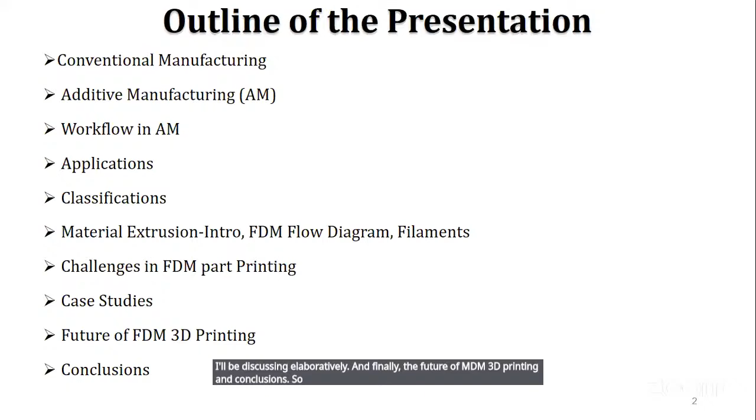So this is the plan for today's presentation. You might have seen this product portfolio - airplane, car, laptop, rocket, motorbike, bicycle, cell phone, and so on.

Now the question is, let us talk about an airplane. When you talk about an airplane, it requires more than 6 million parts. Recently there was an accident in Gujarat where many people died and one person was able to survive. That Boeing Dreamliner has more than 6 million parts. So now the question is, what are those parts, what material are they made of, and what processing methods are used to make those components?

Similarly, when you talk about a car, it requires more than 15,000 parts. The new cars coming nowadays even require more than that. Then again the same question arises: how are they fabricated, what material do they use? So there's a need to understand this. Similarly, it applies to the laptop, the rocket, bicycle, motorbike, and cell phone.

So then, what are the conventional manufacturing processes? As I said in the first slide, there are various methods used, from the beginning we had casting, forming, joining, subtractive, and non-traditional machining. However, in this technology, the subtractive manufacturing process, that is machining, is predominantly dominant compared to all other technologies to get the final component.

Now there was a paradigm shift in technology in the year 1987. Until then, it was dominated by machining, as I said. So it shifted from CNC machines to the SLA machine. In 1987, the first SLA machine was introduced in the USA.

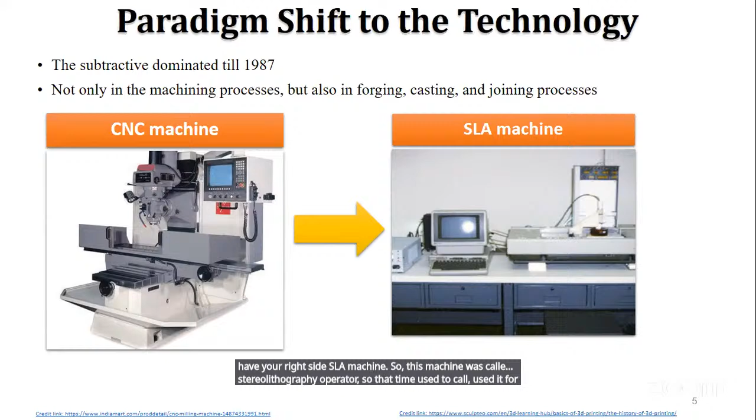You can see in this slide we have this old desktop computer, and on the right side an SLA machine. This machine was called the stereolithography apparatus. At that time it used to be used only for prototype purposes. That was the only function of this 3D printer.

But before that, let us understand what industrial revolutions we have seen so far. The first industrial revolution happened in the year 1784. At that time, Industry 1.0, the buzzwords were water, steam, and coal. What was happening in 1.0? Majorly, people started using equipment and tools, moving from manual work to mechanization. That's what happened in Industry 1.0.

Then when you look at Industry 2.0, the second industrial revolution, it was majorly about electrical energy usage and mass production. The mass production concept was influenced by the slaughterhouse, where they used to hang buffaloes for cutting. Henry Ford watched that slaughterhouse process and implemented it into car production. Most of the cars were made using this method, and that's how Industry 2.0 came into picture.

Then we move on to Industry 3.0, the third industrial revolution, where we witnessed electronics, CNC, IT, and so on. PLC started in the year 1969 and went on till 2011. In 2011, there was an annual fair in Germany that happens every year in European countries, and they announced Industry 4.0 there.

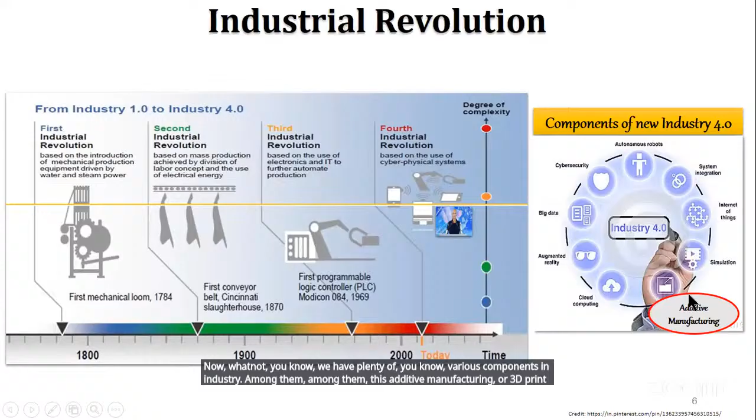That's how this emergence of Industry 4.0 came about, which we talk about today, where we have robots, machine learning, augmented reality, virtual reality, big data, cybersecurity, autonomous robots, automated guided vehicles, simulation, Internet of Things, IIoT, and so on. We have plenty of various components in Industry 4.0. Among them, additive manufacturing or 3D printing is one component of Industry 4.0. That's the takeaway from this slide.

So then, what is additive manufacturing? Dr. Sangmesh is going to discuss the basics in tomorrow's talk. I'll just quickly wrap up what exactly it is according to the ASTM F42 Committee, 2009. The process by which digital 3D design data is used to build up a component in layers by depositing material. This is the definition according to the ASTM F42 Committee.

So what was happening at that time? Geographically across the globe, machines were developing and inventions were happening, so people used to call them different names. As I said, in 1987 the first machine, SLA, they used to call rapid prototyping, and there were also terms like digital manufacturing, desktop manufacturing, and solid freeform fabrication. So there were different names like that. To avoid confusion, in 2009 they standardized the name additive manufacturing, also commonly called 3D printing. All those other names I mentioned fall under the umbrella of additive manufacturing.

There are several techniques, as Sir Satyanan said. We have SLM, DMLS, LENS, FDM, binder jetting, material jetting, and so on. There are several techniques that exist today.

Applications are limitless in the sense that we can use various sectors like aerospace, automotive, apparel, fashion, jewelry, and so on. I'm going to discuss exclusively on that application slide. And the range of materials is not limited to only metals or alloys. It can be used for elastomers, for tissue engineering, for concrete, for apparel, and even for gold. Plenty of materials can be used with this technology.

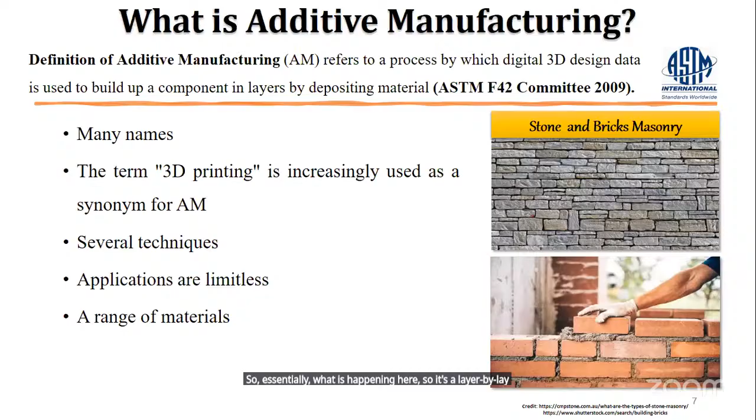So layer by layer deposition and construction is happening. That is what additive manufacturing is. We have several techniques, and this is a generic process plan. These are the steps used to build any AM component in any AM machine.

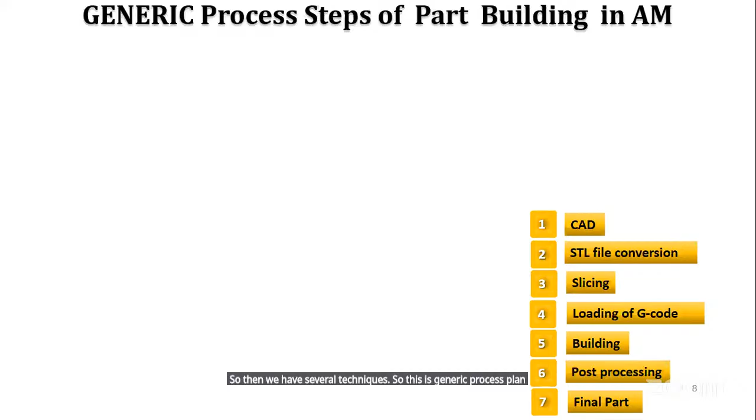The first thing we require is the CAD model. It doesn't matter what idea or proof of concept you have, you must have a CAD model for this technology. We know that we have different softwares like CATIA, Autodesk Inventor, Unigraphics, SolidWorks, Creo, Google SketchUp, Blender, and various other solid modeling softwares. Whatever idea or concept you have, you have to make a CAD model.

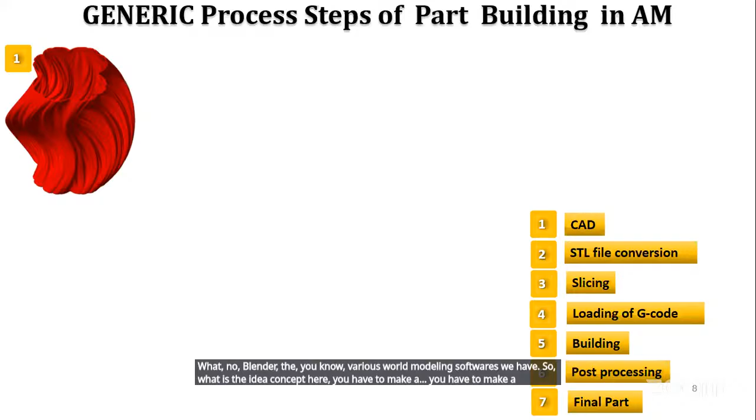Once you have the CAD model, that is the solid model, you have to convert it into an STL file. Why? Because that is the de facto file format for additive manufacturing. However, with recent improvements in technology, we have OBJ, AMF, 3MF, VRML, and various other file formats that are also acceptable. But STL, standard triangulation language, is one of the standard file formats being used. What it does is represent the surface of the solid model using many triangles. If you delete a triangle, you can see inside, it's going to be open and hollow. So that's what STL is, it's very light in size and easy to use for the additive manufacturing process.

Once you have the STL file, you have to load it into the slicing software. What is slicing software? Let's take an example: you have an apple, and what you want to do is cut it into pieces. Similarly, what we are trying to do is take the 3D model and cut it into 2D cross-sectional images, thin layers. We do this using software. Cura is one of the commonly used softwares across the globe because it's open source, but we have several other slicing softwares nowadays like Octoprint and KISSlicer.

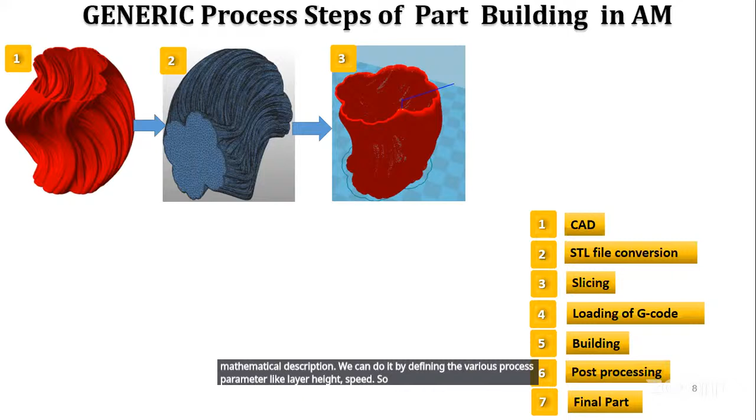Nowadays, the machines being sold have their own company's slicing software, that's how things are coming up. Essentially, we have to slice the 3D model into 2D cross-sectional layers, that's what is mathematically happening. We do it by defining various process parameters like layer height, speed, and orientation. Once you define that, you can slice it.

You're going to have a G-code. What is this G-code? We already know that in CNC part programming, for any drilling, milling, or other operations, you have to write a part program. The similar thing happens here, generating a tool path using software like Cura. That G-code will then be loaded into the machine.

There are 7 categories according to ASTM. It may be FDM, it may be SLM, it may be LENS, whatever technique you have, you load it into that machine, and it will start building layer by layer. That's what happens in the additive manufacturing process.

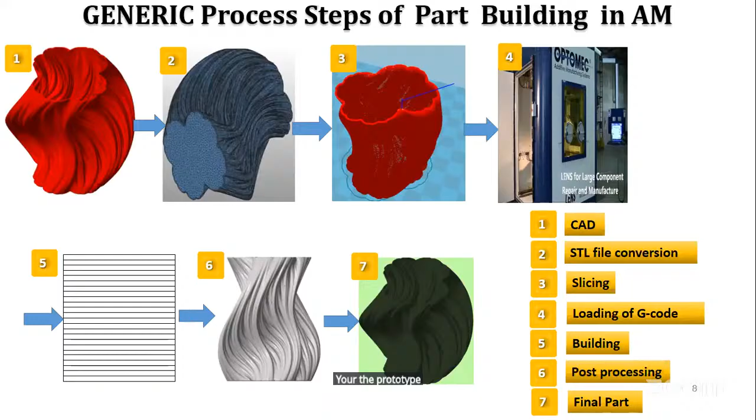Once the layer by layer building is complete, you allow it to cool, then take it out and go for post-processing. What is post-processing? We'll be taking out the support structure, improving the surface finish, putting color, and doing other such things. Finally, you're going to have the prototype or a functional part. These are the generic process steps involved in building any AM technique, and that's what we have to understand.

Now, applications. You can see this slide. When it was introduced, it was used only for prototyping purposes. Since its inception, it has had exponential growth. Initially only used for prototyping, later it expanded to casting, tooling, automotive, aerospace, and we have now reached further.

We're going to have full body organs by 2030. What this means is, across the globe many people die, but no one is ready to donate their organs to the patient who requires them. There is now a need to cater to this requirement. What 3D printing can do is bioprinting, using tissues to print, that is bioprinting.

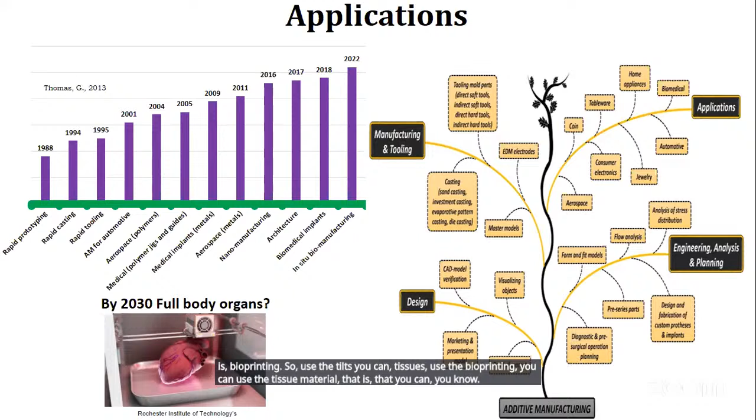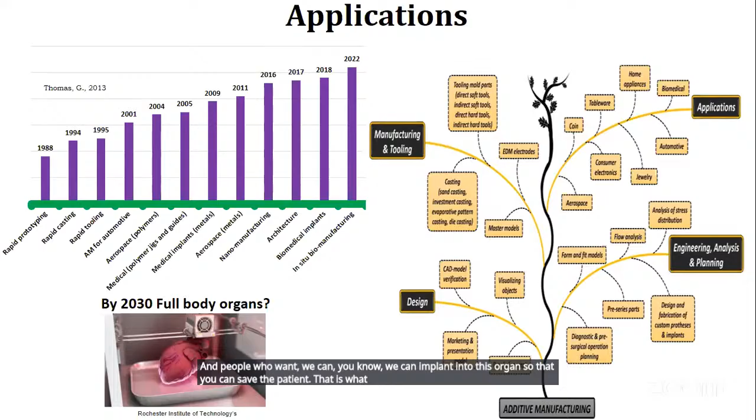You can use tissue material to print organs like heart, liver, kidney, whatever we have, and implant them into patients to save them. That is the motto, expected by 2030. It may take more or less time, but you can expect these things to happen in the future.

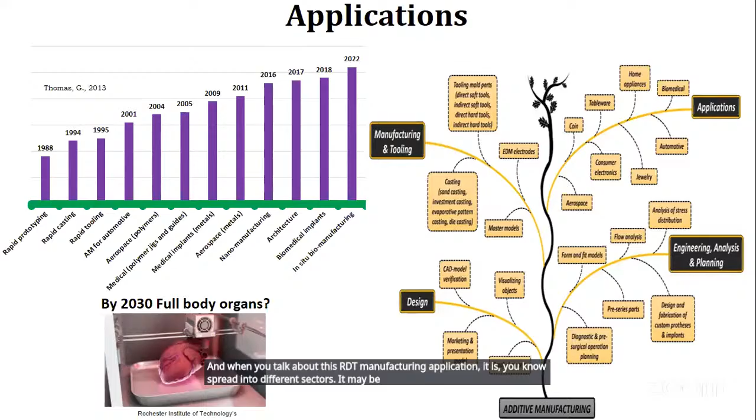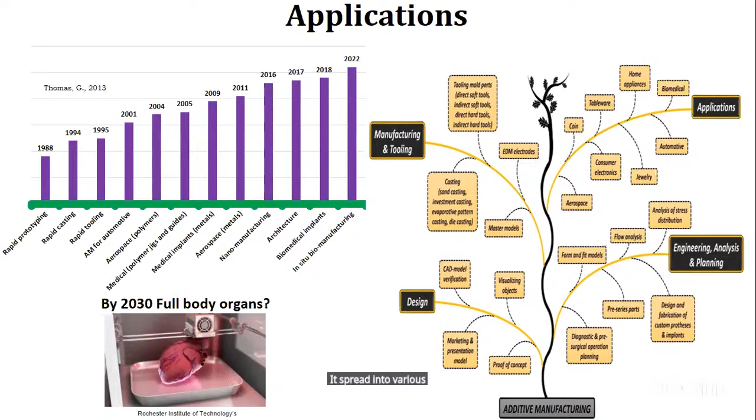When you talk about additive manufacturing applications, it is spread into different sectors - design, engineering, analysis and planning, home appliances, biomedical, automotive, jewelry, consumer electronics, aerospace, and more. That's the application of additive manufacturing since its inception.

Another example in biomedical: using an SLA machine with resin, this component is a clear crystal showing where the bones and brain are. This kind of prototype helps doctors and medical students understand better where the disease or damage is. No other technology can give this information.

If some crack or damage is there, they can easily understand what is happening. Normally during surgery, doctors say they will take a call during the open incision - once they open, they understand the problem better. Those kinds of issues can be avoided if we provide these prototypes to doctors and students.

So it's not only limited to medical prototypes - there are also food printers where you can print chocolate, ice cream, meat, pizza, burgers. In the future, every hospital might have a printer where they can print implants and custom patient-specific food requirements like vitamins and proteins.

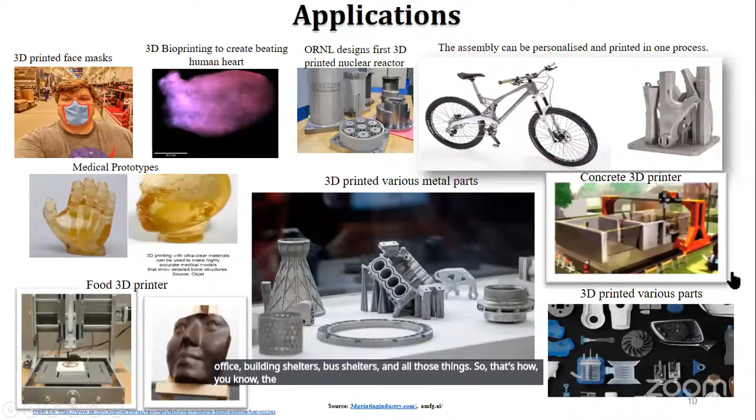Now the classification of additive manufacturing. According to the ASTM F2792 standard, there are 7 families of additive manufacturing. Other techniques exist, but according to ASTM these are the 7 families.

The first is photopolymerization, second is powder bed fusion, third is binder jetting and material jetting, sheet lamination, material extrusion - which I'll explain in detail in the coming slides - and directed energy deposition and hybrid manufacturing.

Satyanan sir mentioned this in the introduction - hybrid manufacturing, where the new faculty has come from Canada. In hybrid manufacturing, assume I have a directed energy deposition machine printing a component - that's not the final part. I'd have to remove support structure or machine it to get the required surface finish and dimensions, taking it to milling, drilling, etc. To avoid that extra time, the same system has a machining option, so once deposition is done, the tool or head changes and you can perform machining directly. That's the whole idea of hybrid manufacturing - it helps finish the component faster.

And there are some new technologies like meld manufacturing, 3DMP, bioprinting, and others.

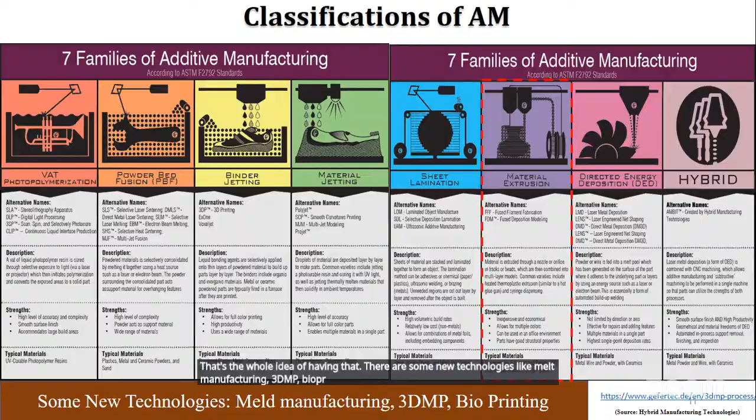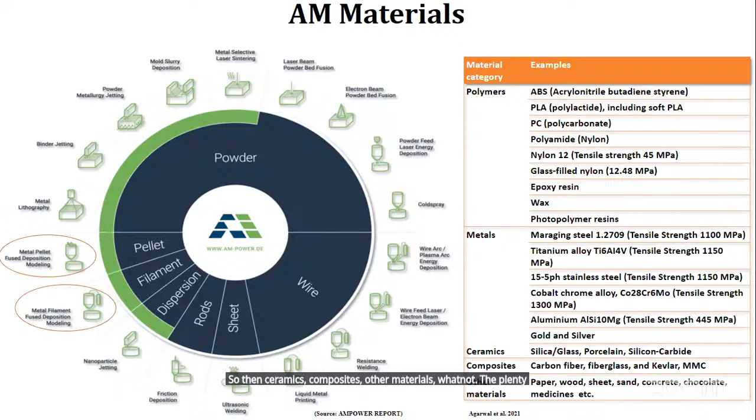Now we are into the topic of material extrusion.

So I'll be concentrating on only the filament-based technique, because in that we have different techniques, granules, and all those things. So what is this material extrusion additive manufacturing?

According to ISO/ASTM 52900:2015, material extrusion is an umbrella term for the 3D printing processes in which material is selectively dispensed through a nozzle or orifice to build the parts.

In simple sense, you can say that when you have a hot glue gun, what you do is just press it, so glue will come out. The same thing happens with material extrusion. We have a nozzle in which wire is fed and maintained at a certain temperature. You press it, and you get a dispensing of the bead material for printing.

Under this category, fused deposition modeling is a famous technology, and Stratasys Inc. developed this material extrusion based FDM technology. Even today they remain a tough competitor to other companies in the FDM technology space. They introduced the first FDM 3D printer in the early 1990s, and the company later developed several models and sold them across the globe.

There are two categories of FDM machines from Stratasys: FDM series and concept modelers. These models cater to various needs, build sizes, materials, accuracy, etc.

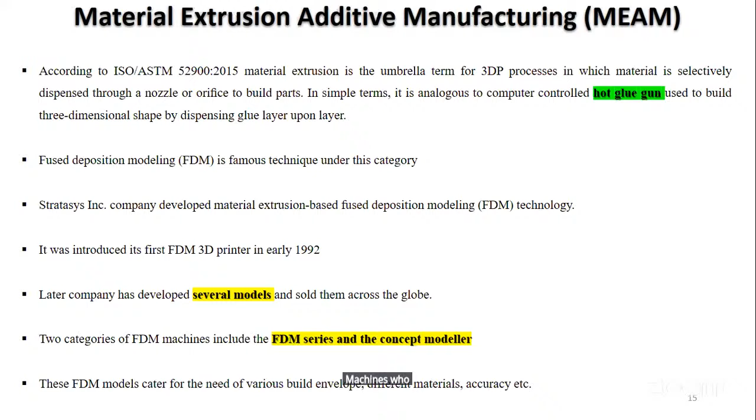This technology is also called fused filament fabrication, fused deposition modeling, robocasting, and fused granular fabrication. In the granular version, instead of filament, we have granules which go into the hopper, but the same layer-by-layer deposition happens.

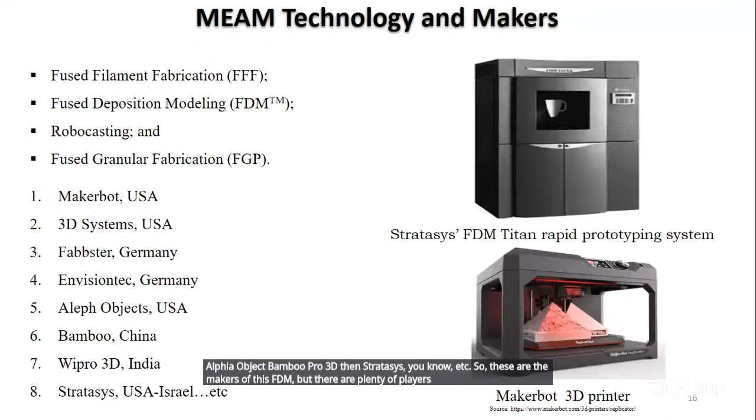The players and makers of this FDM technology include MakerBot, 3D Systems, Fabbster, Envisiontec, Aleph Objects, Bamboo, Wipro 3D, Stratasys, etc. These are some of the makers, but there are plenty of players across the globe now — it's not limited to only these makers.

So how does this FDM process actually work? You can see a simple schematic where we have the build platform on which we build the component, specimens, or coupons. This build platform has a z-axis, meaning it can move up and down, and the nozzle has x and y movement.

In the filament spools, we have two filaments — one for the support structure, shown in orange, and the other for actually building the component. When you start printing, both filaments are fed according to the generated G-code.

The filament goes into the nozzle head, there are some rollers that feed it into the nozzle, and the nozzle is maintained at a certain temperature based on the melting point of the material. It melts and dispenses material through the nozzle, building bead by bead, followed by layer deposition — that's what happens in the FDM process.

You can see the animation explaining the same thing — it's depositing material layer by layer. That's the simple explanation of how this FDM process works.

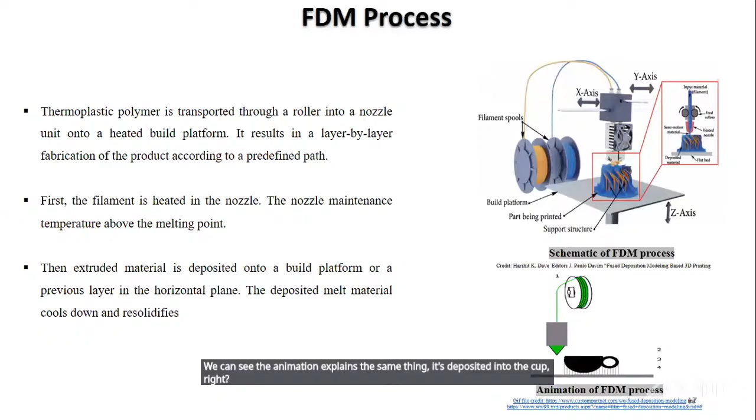There is an FDM movie. I'll just quickly play it, and I'll try to have a voiceover if it's not clearly visible.

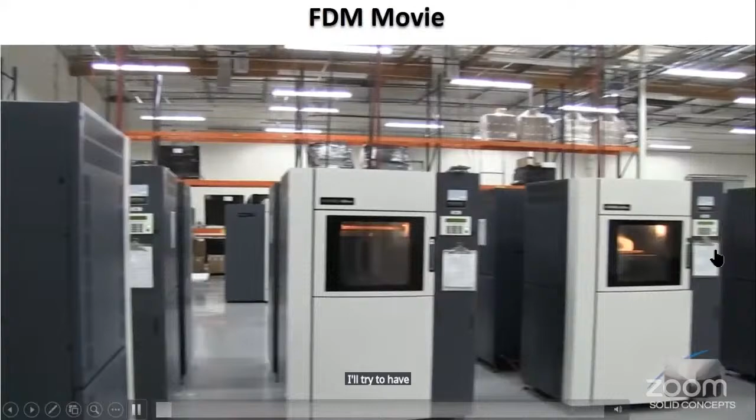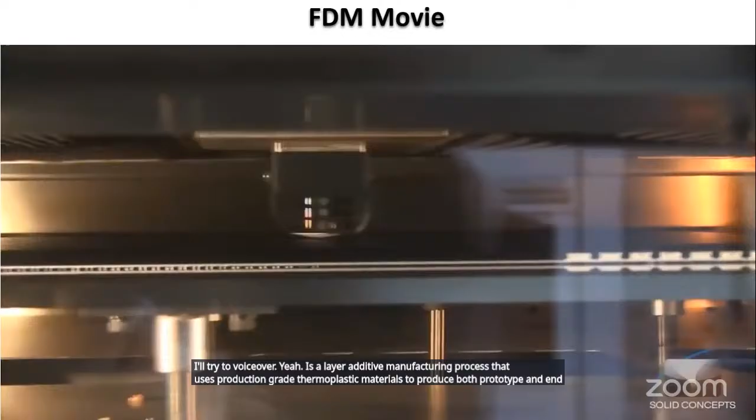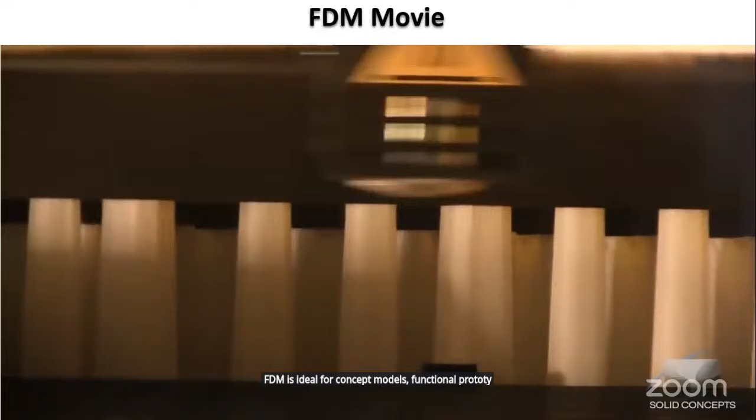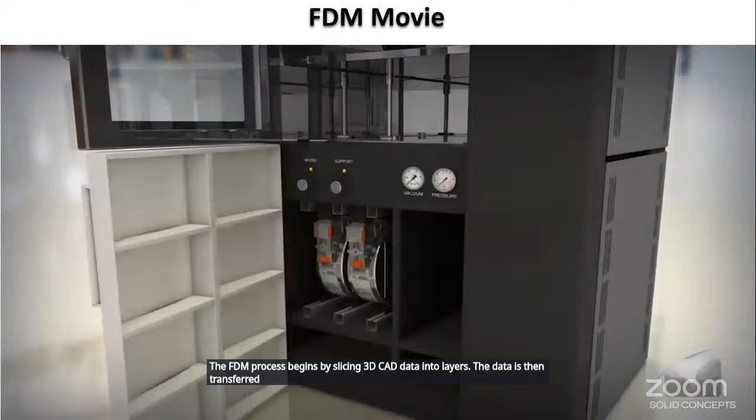FDM is a layer additive manufacturing process that uses production-grade thermoplastic materials to produce both prototype and end-use parts. This technology is known to accurately produce feature details and has an excellent strength-to-weight ratio. FDM is ideal for concept models, functional prototypes, manufacturing aids, and low-volume end-use parts. The FDM process begins by slicing 3D CAD data into layers. The data is then transferred to a machine, which constructs the part layer by layer upon a build platform.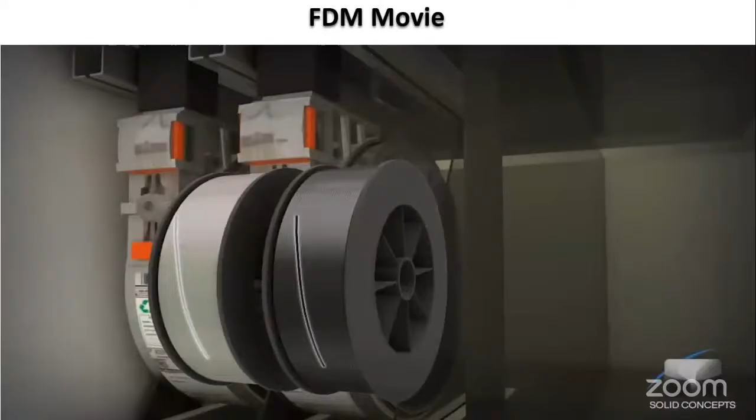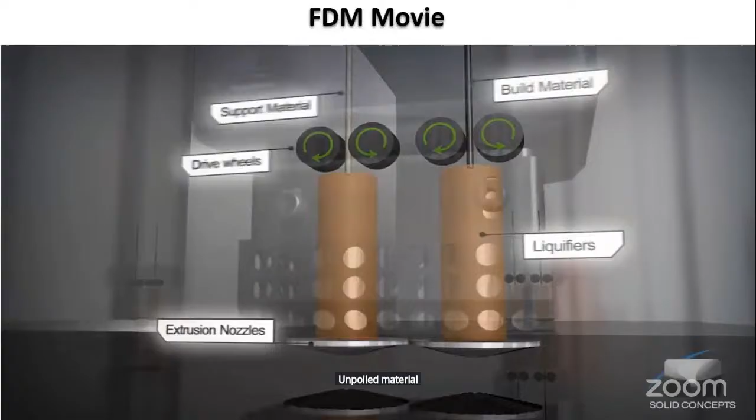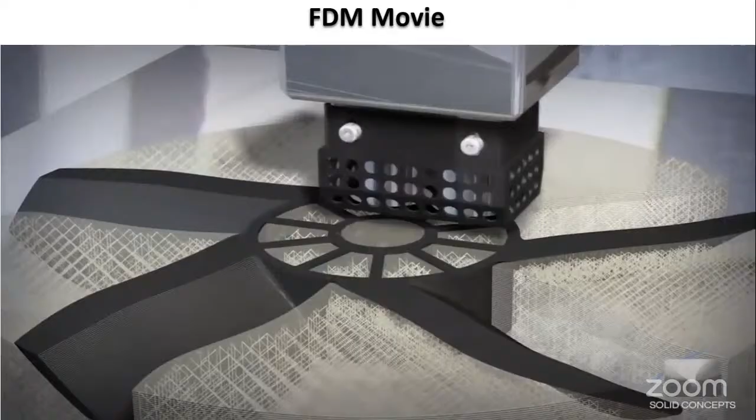Thin spools of thermoplastic and support material are used to create each cross-section of the part. Similar to a hot melt glue gun, uncoiled material is slowly extruded through dual heated nozzles. The extrusion nozzles precisely lay down both support and thermoplastic material upon the preceding layers. The extrusion nozzle continues to move in a horizontal XY plane while the build platform moves down, building the part layer by layer.

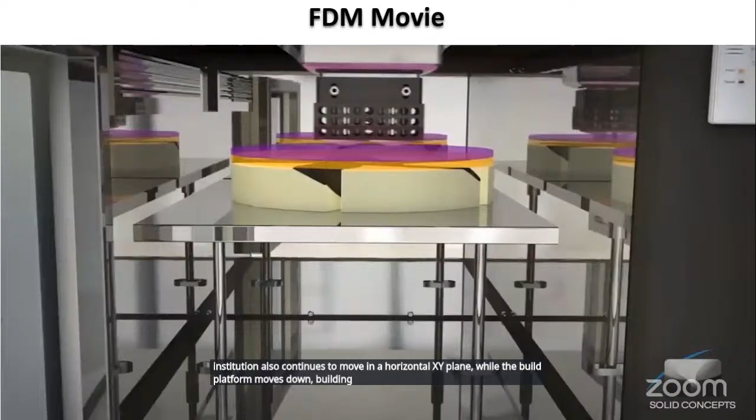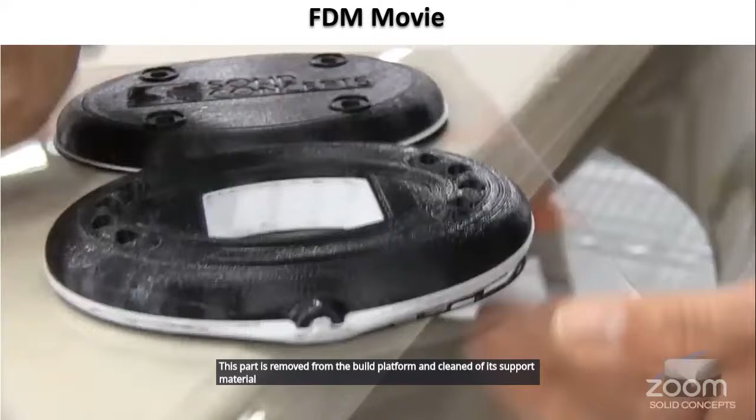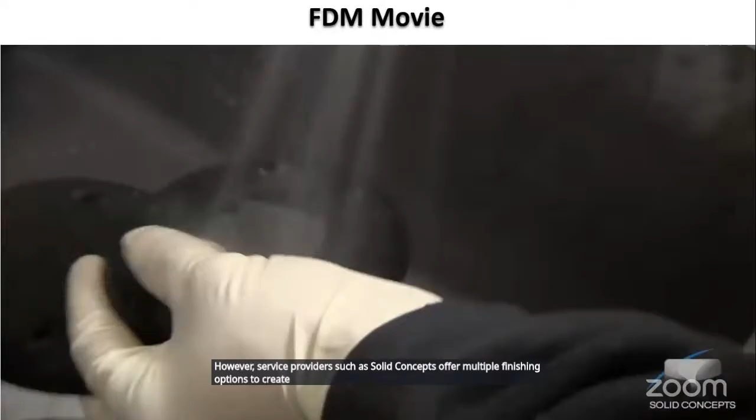The finished part is removed from the build platform and cleaned of its support material. Raw FDM parts have visible layer lines. However, service providers such as Solid Concepts offer multiple finishing options to create smooth, even surface parts, including hand sanding, assembly, and cosmetic paint.

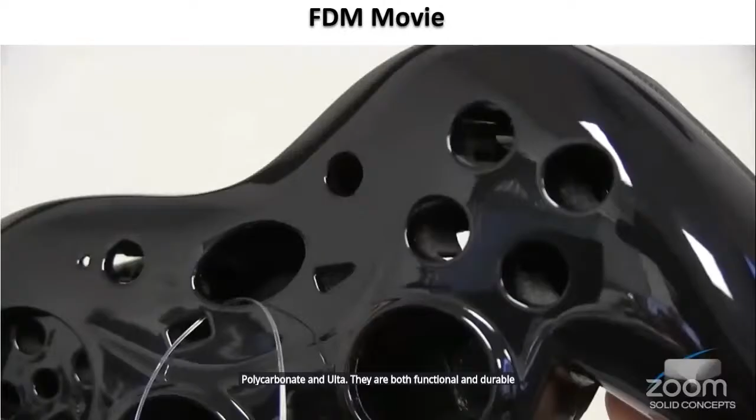Since FDM parts are constructed with production-grade thermoplastics, including ABS, polycarbonate, and Ultem, they are both functional and durable. FDM is utilized in a number of industries, including aerospace, automotive, industrial, commercial, and medical.

So definitely we have to have the CAD modeling, and that can be using software, or you can use reverse engineering. Like maybe if we talk about biomedical, where you have CT scan or MRI data, that will be processed to have a CAD model, or any reverse engineering scanner can be used to scan any component or old products which don't have a CAD model. You can do reverse engineering and get a CAD model.

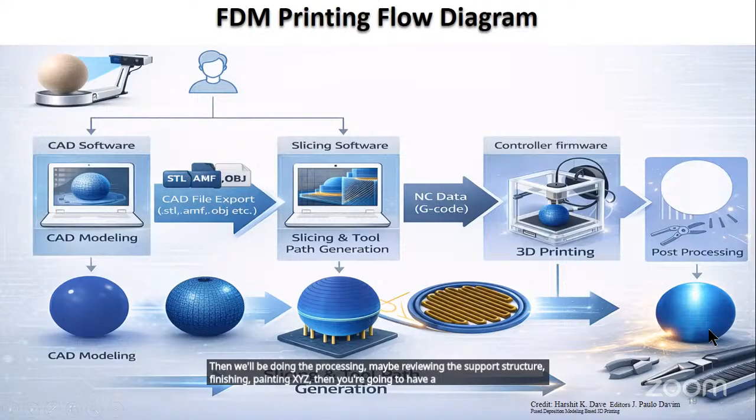And what are the types of FDM printers? There are 4 classifications. The first one is Cartesian, then delta, polar, and robotic arm.

The blue color indicates the build volume of each printer. Among the 4, the first one, Cartesian based, is the commonly used technology across the globe, and it's available at a cost of 10,000 rupees onward. On Amazon it's available at 10 to 15,000 rupees for a printer. That's how cost-effective 3D printing is, unlike other machines such as DLP, which is also available but at higher cost. This is one of the lowest cost printers available.

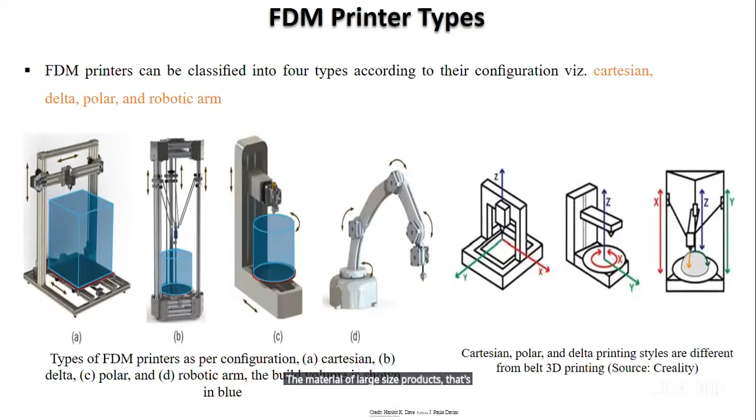Anyway, these are the 4 types you can expect. The 4th one, importantly the robotic arm, is generally used to build larger size components. In our department, one professor recently did a project for DRDO, where they built this machine to print composite material for large size products. They successfully delivered it to DRDO. So that's how things are happening, and it's commonly used in concrete 3D printing as well.

Now what are the feedstocks in FDM? There are various materials. Basically they started with PLA and ABS, which are commonly used nowadays. But apart from that, you have PEEK, Kevlar, LDPE, TPU, PETG, carbon fiber, and more. Plenty of materials are available as feedstock for this FDM technology.

If we talk about the wire, that's the filament. It comes with 1.75 or 2.85 millimeter diameter, based on the machine you have, so it will accept either the 1.75 or 2.85 diameter filament. There's also FGF, fused granular fabrication technique, where it accepts pellets instead. It will be fed in, and the rest happens the same as with the filament machine.

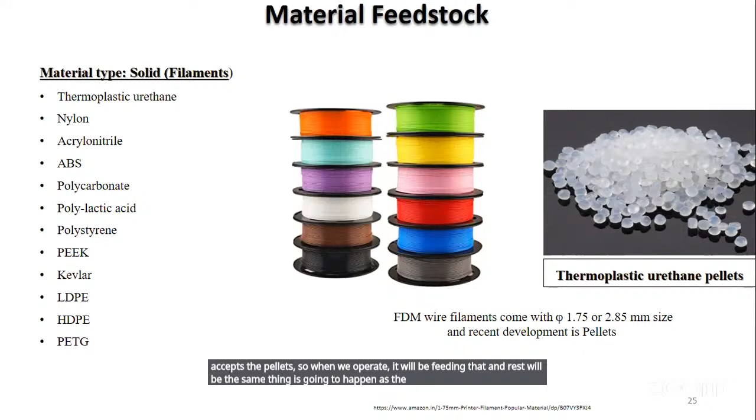So then, FDM process parameters. If you take additive manufacturing, as discussed in the classification, all machines have various process parameters. These are specific to the FDM machine, like the nozzle. Quick explanation: we need to maintain a certain temperature at the nozzle. For example, to print PLA using FDM technology, the rated temperature is 190 to 220 degrees centigrade. That's the range you have to give, so that once the PLA material enters the rollers, it melts and is properly dispensed onto the substrate or build platform.

Bed temperature is also recommended at 40 to 60 degrees centigrade. This kind of temperature differs for different materials. ABS is different, TPU is different, LDPE is different, PC is different. Each material has a different melting temperature and bed temperature. If you're buying filament, this will be given, or if you're developing a new material system, you have to do DSC, TGA and other tests to confirm these things.

Then let us talk about layer height. What happens with layer height? If you decrease the layer height, it takes more time, but you get a good surface finish as well as good mechanical properties. But if you go with a higher layer height, you have to lose these properties.

Similarly, infill density: none of the conventional methods can give this kind of infill density percentage filling. So 10%, 25%, 50%, 80%, whatever it is. Based on the type of component you have, you can fill this to save material, or have a higher percent if very good strength is required, or if you're looking at only a prototype, then you can go with 10%, even lesser.

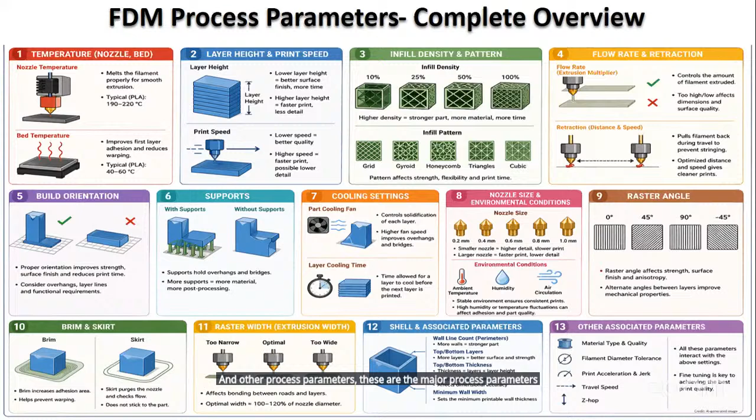Raster angle is also very important for tensile strength: 0 degree, 45 degree, 90 degree - I have an example for that which I'll discuss. Then brim and skirt at the starting of printing, we check whether proper printing is happening or not, and other process parameters. These are the major process parameters we look at when printing the material.

Anyway, when you start printing, there will be some defects. It's not like you have a filament, a printer, and a CAD model - just load it and you're going to get a component. No, nothing like that. There will be some problems.

Like in this figure, we have warpage. What's happening here: during printing, we have to give bed temperature. Assume the bed temperature is not sufficient - gradients are going to play a significant role causing warpage or delamination. The entire product will warp, and whatever was printed, maybe 5 hours or 6 hours or 1 day, that component is lost. So this kind of error comes into picture.

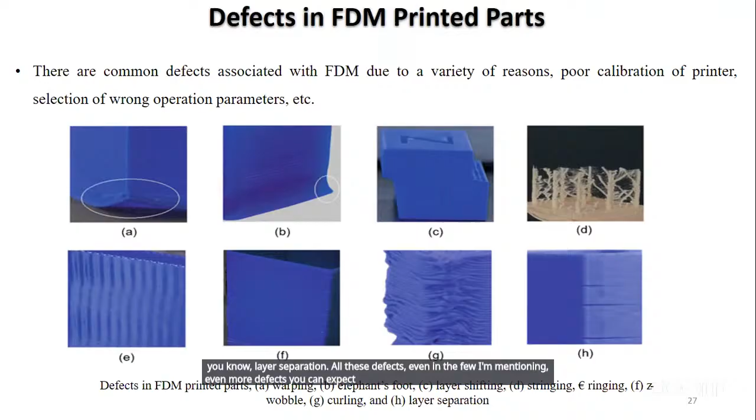Then you have elephant foot, layer shifting, stringing, Z wobbling, curling, then layer separation - all these defects, even though I'm mentioning a few, you can expect even more defects in 3D printed parts. I have exclusive case studies and challenges for this which I'm going to discuss in coming slides.

So this is the 3D printer we have in our lab, and the specification of this 3D printer. It is MD400D, purchased under a seed grant. When I joined, they gave some fund for us to buy this - I purchased it under that seed grant, and this is the specification.

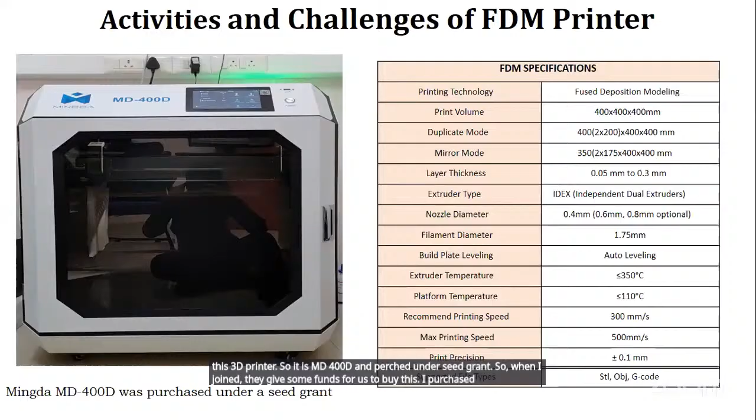This is a concrete 3D printer nozzle. You can see in the first figure we have a bulge diameter and layer shifting. It was almost finished, I think 70%, then we could see the layer shifting of this component. It means after maybe 4.5 hours, we had a layer shifting, so it means we are wasting time, material, and all those things.

So what was the problem causing this failure, and how did we fix it? You can see in this second image - these are finished parts of ABS and PLA, so we were able to print it properly. The problem was the Z-axis calibration was not performed. The build platform calibration was the issue, and it was deviating from the actual movement.

That was the cause of concern, and we did the recalibration, and it was successfully printed. This printer nozzle was part of one of the projects, a concrete 3D printer, where we have a pump, and this is one part of it. So we were printing for that, and this issue occurred multiple times.

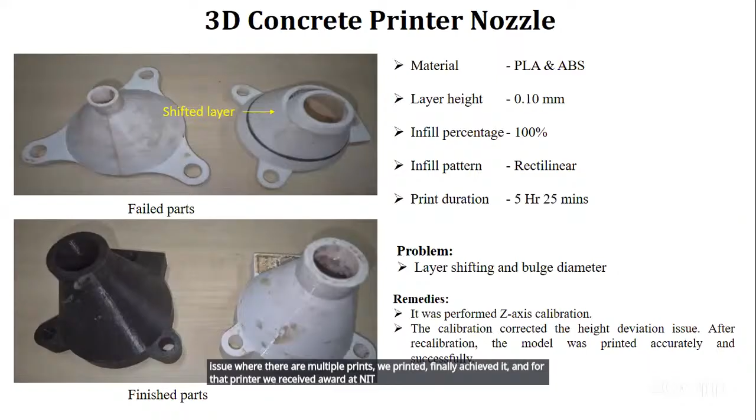Then we tried to understand the STL file, recycling and all those things, but it still kept happening. What we noticed was, if you see the AM process of building, the generic process plan, first you're supposed to have the CAD model, then convert it to an STL file. So during this transition from the CAD model, the solid model, to the STL file...

Assume there's some error in the solid model, or when converting to the STL file, because of the tessellation language surface representation, maybe you have complex geometry, some XYZ issue, and you are unable to convert a proper STL file.

Generally what happens is, once you convert the STL file, there are softwares like Netfabb that load the file and check it — is there any overlapping, any missing facets, and so on. There are some errors that occur when converting from one file format to another. The same thing happened here.

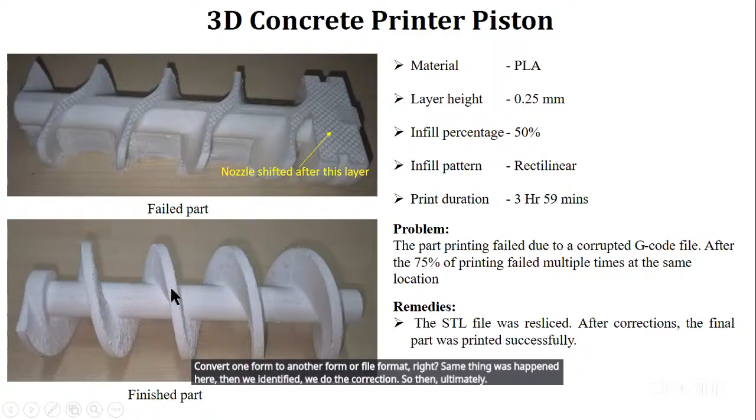We identified the issue and did the correction, and then ultimately we were able to print this component. This is the finished part of the piston for the concrete 3D printer.

Like that, we tried an NDT sample using PETCF. We can see the warpage that happens, along with stringing and filament bulging, for this PETCF material.

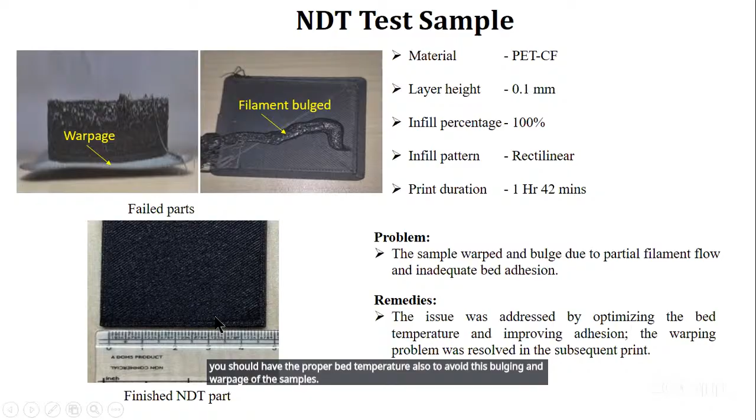The problem was that the warpage and bulging were due to the bed temperature and poor adhesion to the build platform. You should have the proper bed temperature to avoid this bulging and warpage of the sample. Finally, we printed the proper one after changing the bed temperature.

For the tensile test, TPU is one of the elastomers, a highly flexible material used for many applications. We tried to print this virgin TPU material with these process parameters. The sample took 28 minutes, but you can see issues like poor surface finish and stringing happening.

The remedy for this was adjusting the nozzle temperature — that was the issue — and also recalibration of the printer was necessary, so that we obtained the final finished tensile samples with good surface finish for this TPU material.

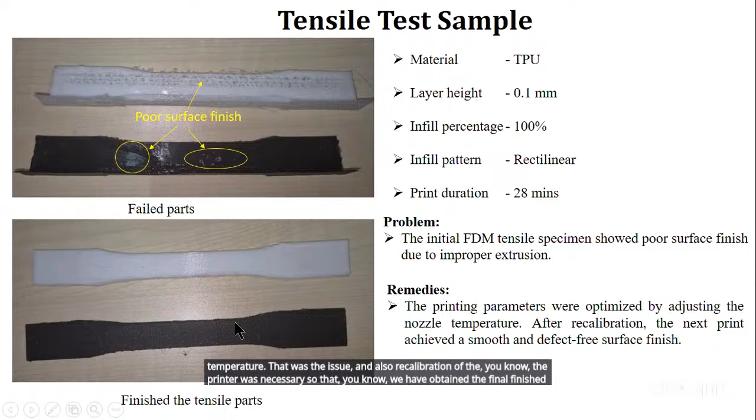As I said, raster width or raster angle is one of the important process parameters in FDM technology. We tried printing this TPU with a superstructure of PVA, with the TPU core printed at 45 degrees.

We printed successfully at 0 degrees, and successfully at 90 degrees, but at 45 degrees we were unable to print it. You can see the first is the manual support we gave, and the second is the tree support — in the slicing software, you have different support types. We tried it, and even used PVA.

PVA is the supporting material — if you dip it into water, it dissolves very easily. That's what PVA is, a very expensive filament. We tried that one.

You can see what is happening — we were completely unable to print it. After stopping, this is the superstructure and this is the actual component at 45 degrees. You can see this is the superstructure and this is the tensile sample, the 45 degree one. Stringing and other errors kept occurring, and we were still unable to solve this problem for the TPU material.

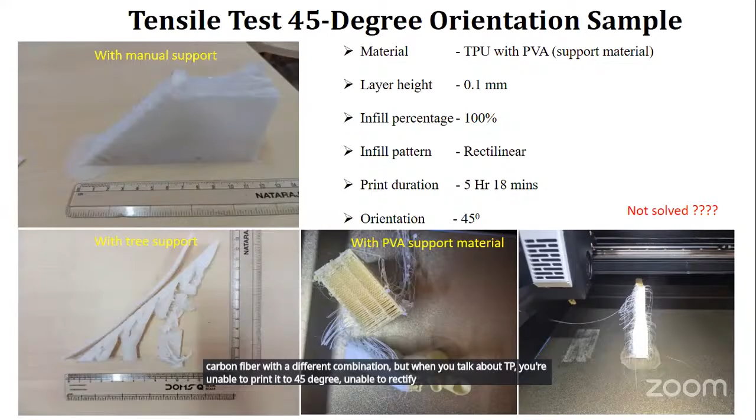We have printed other materials like PLA, ABS, carbon fiber with different combinations. But when you talk about TPU, we were unable to print it at 45 degrees, unable to rectify it. We tried many ways of printing it, so I think we'll try to print that as well in future.

Anyway, another challenge was the micro tensile sample. We tried PETCF for the sample. You can see there is some irregular surface texture on the micro tensile sample when trying to print the PETCF. It was taking just 6 minutes, but we were not getting a good micro tensile sample. So we identified issues like cleaning the nozzle, because sometimes when you change different materials, there will be some debris of particles inside the nozzle.

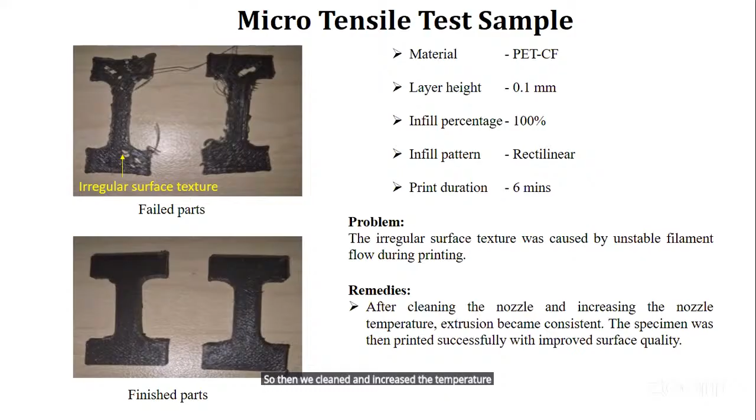So we used e-copper to print it, and those copper particles were there inside the nozzle. So then we cleaned it and increased the temperature, and the extrusion became consistent. Then we were able to print successfully these micro tensile samples of the PETCF. So that's how we tried it.

Sorry, I think this is disturbing. Yeah, okay.

Yeah, great. So this is a rocket nose cone prototype. In machine, this is one of the largest components we have printed using FDM technology. It took 1 day 57 minutes without interruption, and these are the other process conditions.

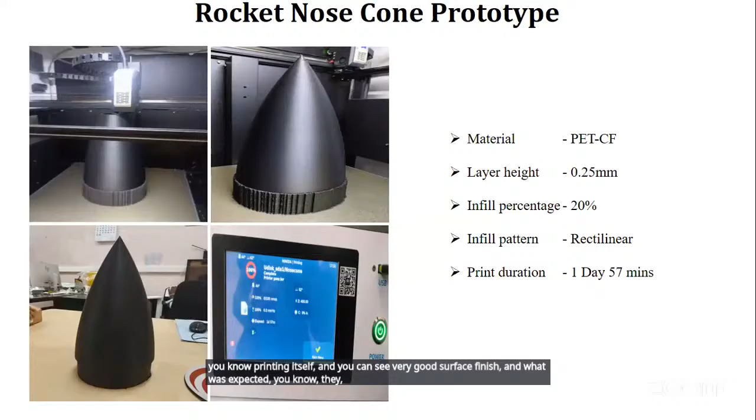This rocket nose was printed for one of my colleague students who participated in the ISRO challenge. To understand how the machine works, it came out very good in the first printing itself, with very good surface finish, and what they expected, we were actually able to print in one shot. So that's how we tried the printing using our printer.

So that's a different activity we have tried using FDM technology. Similarly, we are trying to print membranes. Membranes are used for various purposes like filtering, using e-copper, ABS, PLA, TPU.

The diameter is around 75 millimeters and the thickness is 0.3 millimeters. We printed only 2-3 layers with different layer configurations, and we were able to print it. The idea is to have different porosity, so that water passing happens while different particles, water, chemicals, whatever it is, can be prevented. That's the whole idea of printing these membranes.

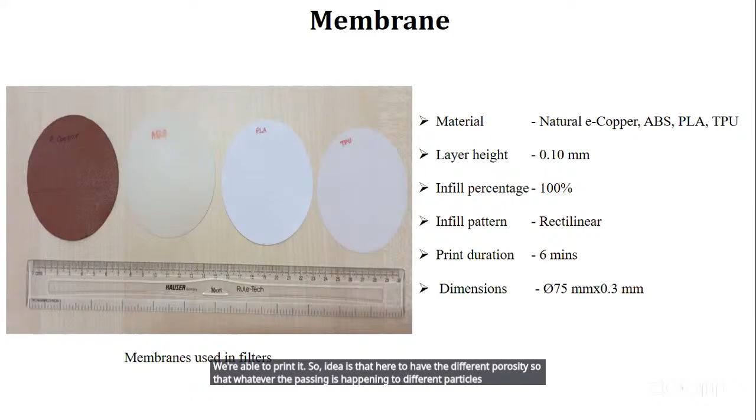One of my colleagues in chemical engineering tried this for him. So then, methods for producing the filament - those are the challenges with respect to FDM that we tried for different materials and components.

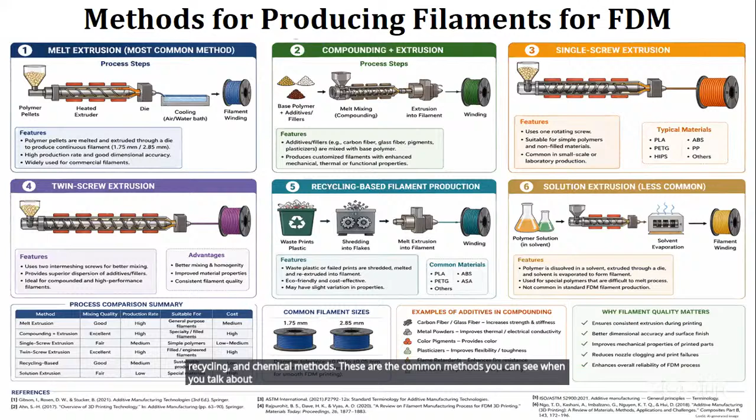So now the actual work - I want to start here with the filaments. When you talk about filament for FDM, we'll be using different methods like melt extrusion, compounding and extrusion, single screw extrusion, twin screw extrusion, recycling, and chemical methods. These are the common methods for filament production for FDM. I'll not go into detail on this technology.

Now let us see case study one, where we used single screw extrusion of TPU composite for filaments. We had the TPU material, the filament pellets, and we also purchased PLA, and tried to mix some composition to produce TPU-PLA composites.

So now what is this TPU? TPU is known for high flexibility, elastic recovery, toughness, and abrasion resistance - ideal for various applications like football, wrist brace, biomedical applications. But the problem with TPU is the strength and toughness. When you talk about PLA materials, it has high stiffness and strength compared to TPU, but it's brittle. It's also used for various purposes.

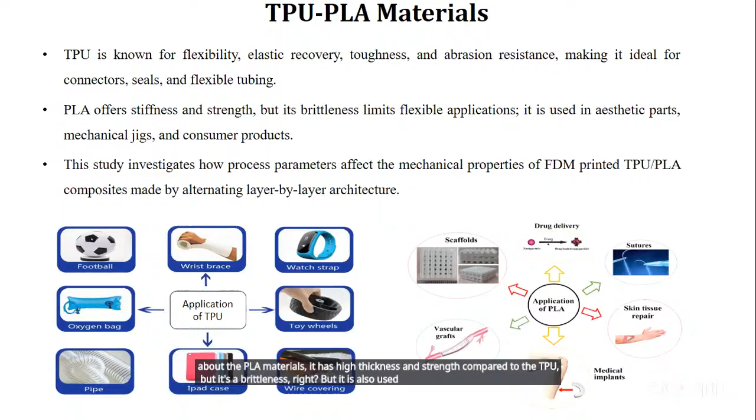Now these two materials were selected to produce the filament. So we have the PLA pellets and the TPU pellets, purchased from the rightful vendor. Then we used this single screw extruder, RP extruder machine we have in the mechanical engineering department - one of my colleagues provided this facility for extrusion of the TPU-PLA composite, and after various permutation combinations, we were able to obtain this TPU-PLA composite.

Different combinations were tried, like 90% and 10%, 80%-20%, 70%-30%, something like that, and we were able to obtain these filaments as expected.

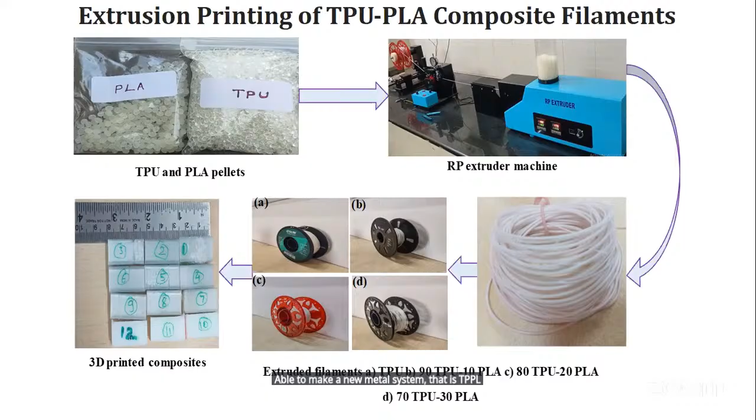So then you can see these wound TPU-PLA composites, and these filaments were again used in the FDM printer to print compression samples. So this is how we were able to make a new material system - TPU-PLA composites. Okay, let us see some results on this.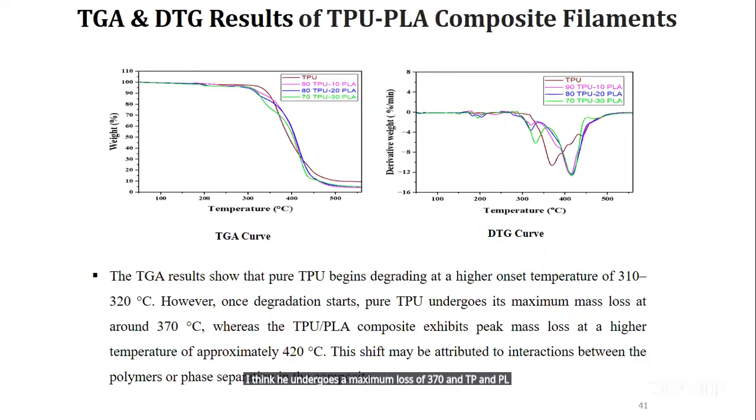This kind of knowledge is very important because we have to give the proper bed temperature and the proper nozzle temperature. That's how important it is when you go for printing with FDM.

Now there's the melt flow index, which helps us understand the flow of the liquid material through the MFI. Pure TPU demonstrates a high MFI of 19.709 grams per 10 minutes. For the composite we prepared, it was 3.099 grams per 10 minutes. That's the knowledge we gathered through the MFI.

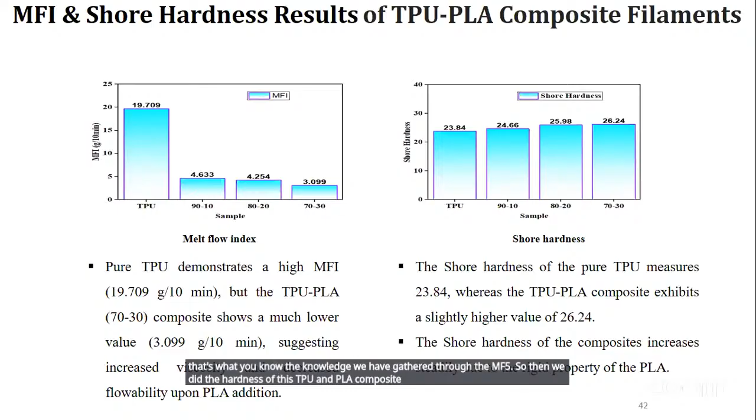Then we did the hardness test of TPU and TPU-PLA composite. The TPU-PLA composite hardness was enhanced due to the addition of PLA. That's the result we got.

I'm not presenting the compression samples we printed for TPU-PLA because we have some undisclosable information on that, as we are submitting a paper. So right now I'm not showing any results on the 3D printed samples we did with the single screw extruder.

Now for case study 2, novel in situ preparation and printing of TPU composites. In the previous case study, we used a single screw extruder where you add the pellets, perform some process parameters, then obtain the filaments for the FDM 3D printer. But here we tried using the FDM printer we have in our lab.

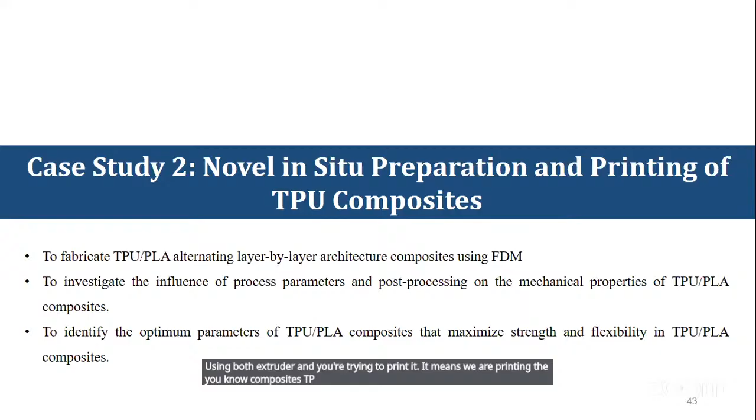There, one filament is TPU, another filament is PLA. We have both extruders, so we used both and tried to print it. This means we are printing the composite, TPU-PLA composites, in situ. That is the idea of the second case.

You can see clearly this schematic explains the alternative layer fabrication of TPU PLA composites. This is the spool where we have the PLA, and this is the spool where we have the TPU, that's the red color. Now we have two nozzles in that printer.

What happens is the first layer is printed by the PLA and the second layer is printed by the TPU, using the second extruder. That's what happens when we talk about alternative layer fabrication for making the TPU PLA composite material.

So you can see the schematic again. One nozzle prints, that's the green color PLA, and the second nozzle is idle. Once it is done, the second nozzle comes and prints the TPU. That's what happens.

And this is the micro tensile sample, following the ASTM standard: 38 overall length, 15.9 width, 4.8 gauge width, gauge length is 22.2, and thickness of 3 millimeters. That's the dimension we printed.

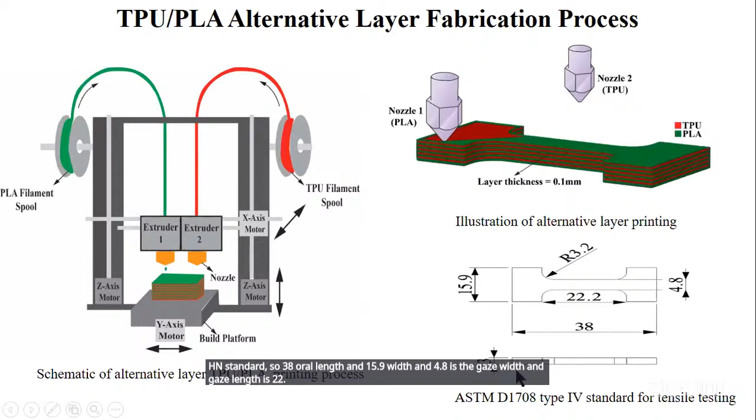We used various process parameters like infill type: trihexagon, archimedean, 3D honeycomb, octagram spiral, rectilinear. Then we varied the infill density: 20%, 40%, 60%, 80%, 100%.

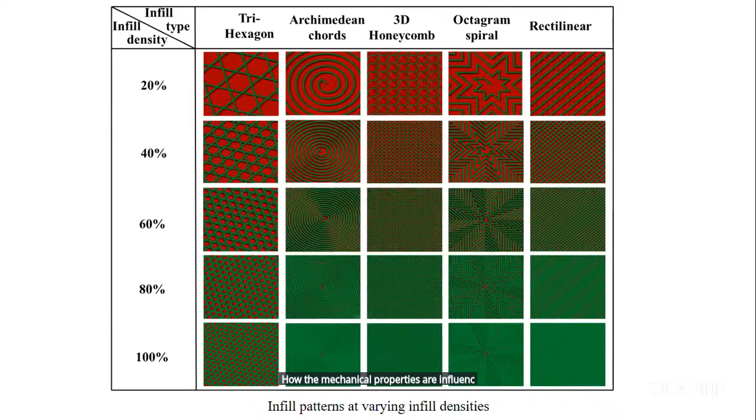We wanted to know how the mechanical properties are influenced when you print alternative layers of TPU and PLA. That was the whole idea. These are the constant process parameters used to print these 27 samples, L27: layer height is 0.1, print temperature is 220 degrees centigrade, bed temperature is 60 degrees centigrade.

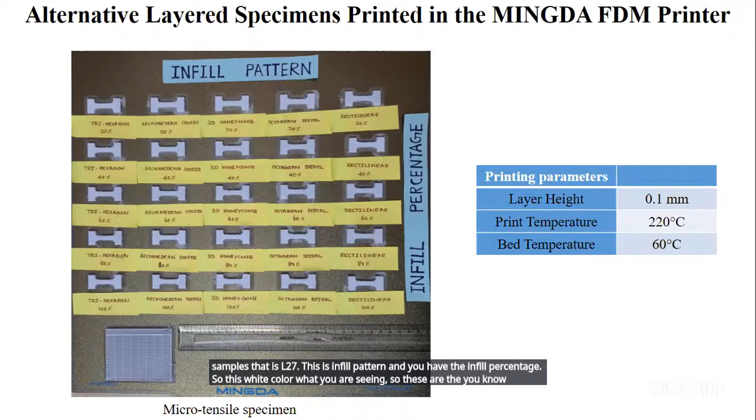Now we can see, using that machine, we printed 27 samples, that is L27. This is the infill pattern, and you have the infill percentage. This white color you are seeing, these are the alternative layered micro tensile samples that were printed.

Anyway, now we did the tensile test of these samples, from trihexagon to rectilinear. The takeaway from this slide is that the 3D honeycomb structure infill pattern gives better results compared to the other infill patterns. Why? What is the reason? We found that through the fractography. If you see this figure C, where we did the SEM, what is happening here is the fracture is happening through the hook.

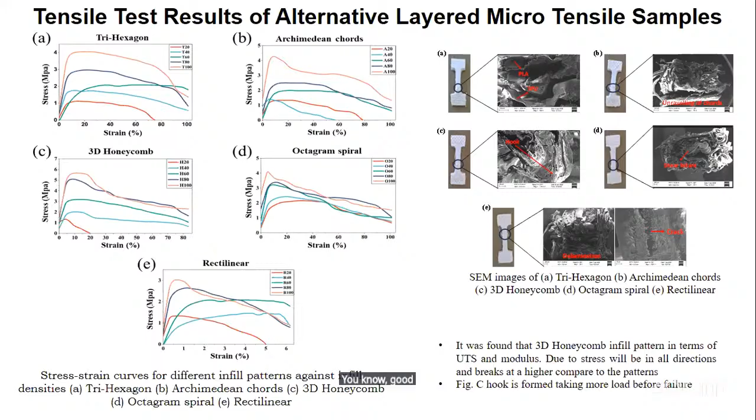It means before the fracture, inside the material a hook kind of shape is forming, and it's arresting the dislocation, taking more load compared to the other material. That's how we are getting the good tensile properties in 3D honeycomb compared to the other materials. So you can understand that clearly here.

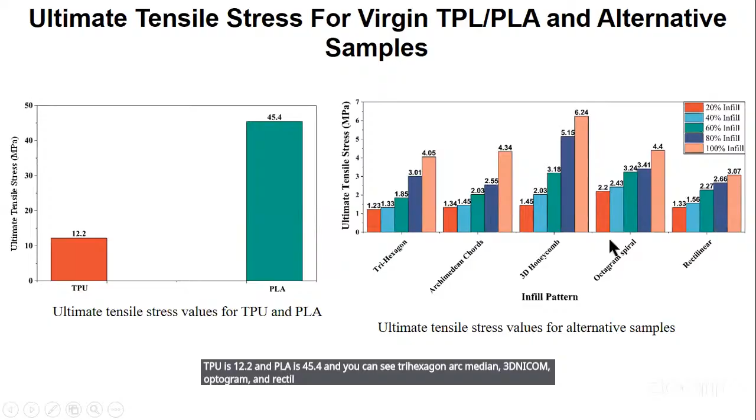We did the tensile test for the TPU and PLA virgin material and the TPU PLA composite material. Here in this slide you are seeing the ultimate tensile stress alone. TPU is 12.2 and PLA is 45.4. You can see trihexagon, archimedean, 3D honeycomb, octagram, and rectilinear patterns. Among these, 3D honeycomb is better because, as I explained, of what was happening.

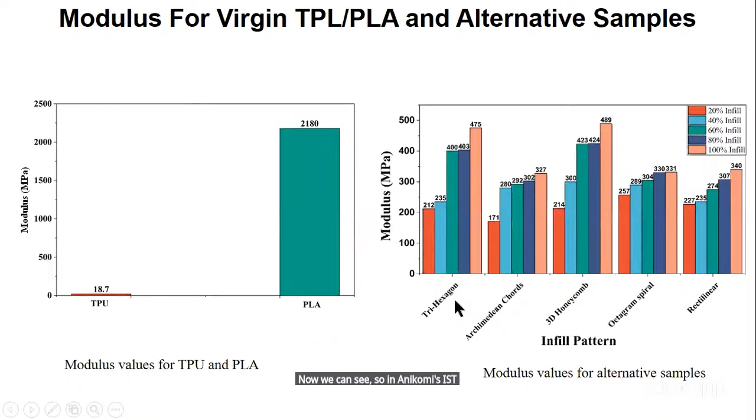Similarly, we extracted the modulus. TPU is 18.7 and PLA is 2180. Now we can see honeycomb is highest, followed by trihexagon. The same reason applies here. This is the takeaway: how infill patterns can influence the tensile strength properties.

So then, almost we are coming to the closing. The future of fused deposition modeling 3D printing.

Then in situ compounding and direct pellet printing. Instead of extrusion, which is time consuming, we can use in situ compounding and direct pelleting, where granules are used, FGF. In case study 2 we have tried the same thing. Actually, I could not find any literature for whatever work I presented in case study 2, so we submitted it for a good journal, hoping for publication. That kind of work is going to happen.

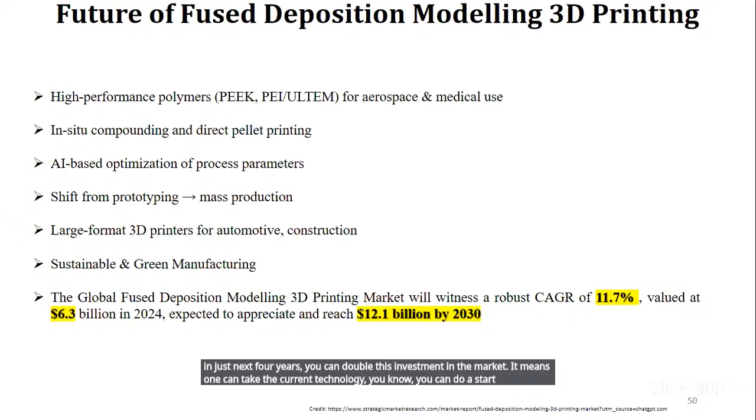It means one can take up a career in FDM technology. You can do a startup, whatnot. So plenty of things can be done with respect to FDM technology. That is what the market survey says.

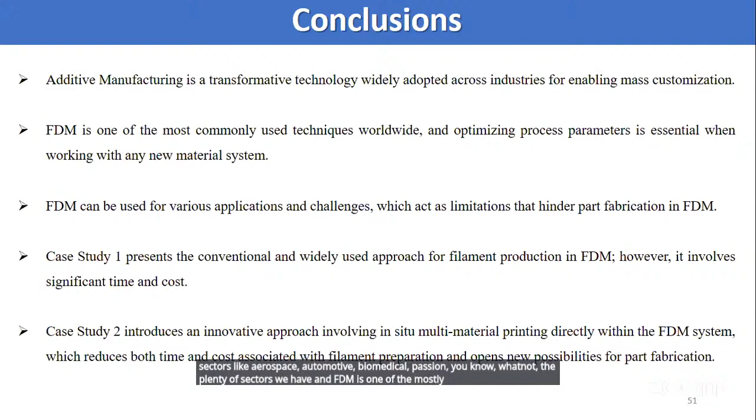So conclusion, last slide: additive manufacturing is definitely a disruptive technology, widely accepted in various sectors like aerospace, automotive, biomedical, fashion, whatnot. Plenty of sectors we have, and FDM is one of the most used technologies across the globe because a starter printer at 10,000 rupees you can buy on Amazon also.

But the thing is that optimizing process parameters is essential, because when you are working with a new material system, this is very, very important. We cannot have a new material and print like that directly. That is not possible. Then it can be used for various applications as I suggested.

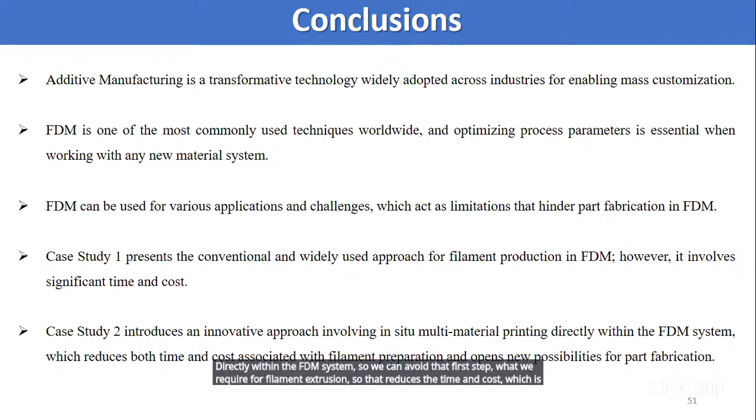Case study 1 presents the conventional and widely used approach for filament production for FDM, but however, it increases the time and cost. Case study 2 introduces an innovative approach where you can do multi-material printing directly within the FDM system, so we can avoid that first step required for filament extrusion. This reduces the time and cost incurred for filament production, and opens new possibilities for part fabrication.